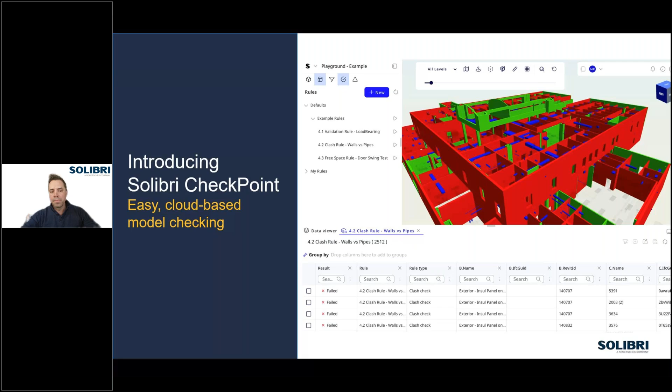Solibri CheckPoint was actually just released to market a few weeks ago. So the purpose of the webinar today is to really provide that first look at what the product does, how it works, show you the look and feel of the product. So we're going to focus on a few things as Ward walks through the demo today. Simplified rule check, so there are just a few rules to consider, which makes it easier and faster to check your model. We support Revit and IFC files, even in the same project.

We bring direct Revit support now. Some key integrations that we're going to highlight are with Autodesk, both Construction Cloud and BIM 360, as well as Procore. So we think it really becomes easier to plug into the majority of workflows here in the US. And also really pay attention to the workflow and the interface. We tried to keep it clean, simple, intuitive, so model checking can really be put into the hands of many rather than just a few power users, to really help drive quality and better project outcomes.

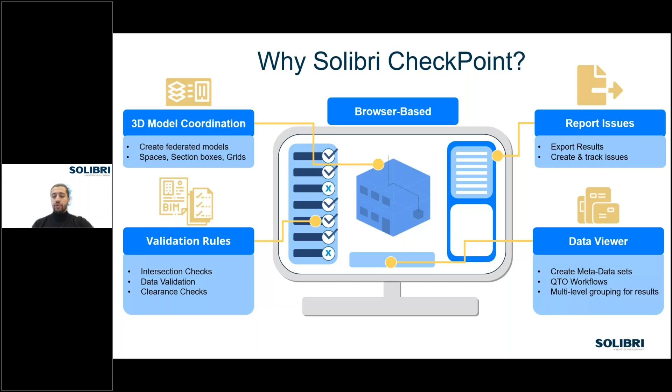Okay, and also about CheckPoint. The instant and generic rule checks make it easier for our users to create hundreds of checks. You'll see the difference, especially for users who have been using Solibri Office. It's important to know that CheckPoint is not a replacement for Solibri Office, it's there to enhance the workflow.

With the generic rule checks we have, you can create hundreds of rule checks to validate your models. You can also create multiple model sets because there's no cloud limitation or cloud space limitation for the number of models or federated models you can have. Also, we're working with both native Revit and IFC, so we're not limited to either one.

Since CheckPoint is fully integrated with other CDEs, just like ACC and Procore, as Jason mentioned earlier, there's live synchronization between these platforms, which enhances overall collaboration. And the most important thing is that there's no plugin or desktop application required to be installed locally or added to CheckPoint in order to check your models.

So that was a quick overview on CheckPoint. If you have any comments or questions, feel free to drop them in the questions section. From now, I'll just stop sharing this screen.

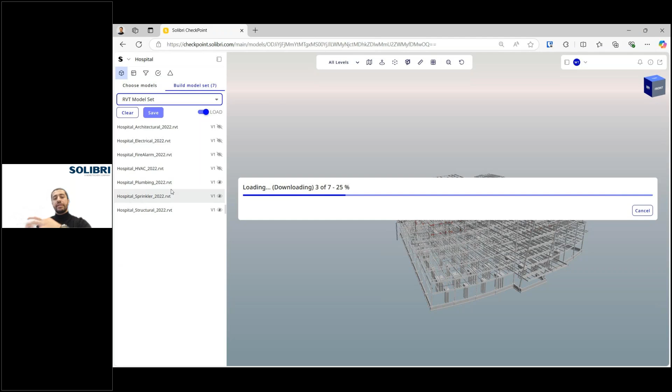Okay, so as soon as it loads, let me give you more insights on the 3D viewer of CheckPoint. Being in the browser allows me to navigate freely through the files without the need to export it into another file format compatible with the browser. What happens in the back end is that CheckPoint gets the original file and converts it through one of our conversion methods into a viewable file in our browser.

This file is compacted, which means it is much smaller than the original file, and this makes it easier to handle in the 3D viewer.

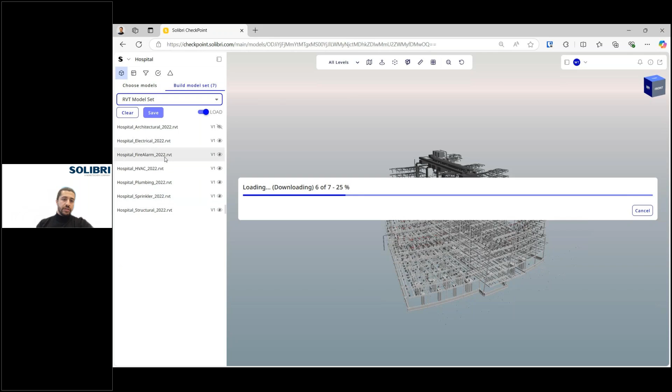Okay, so I see these 6 files. I'm loading 7 different models to create one federated model. As you can see, different disciplines for these.

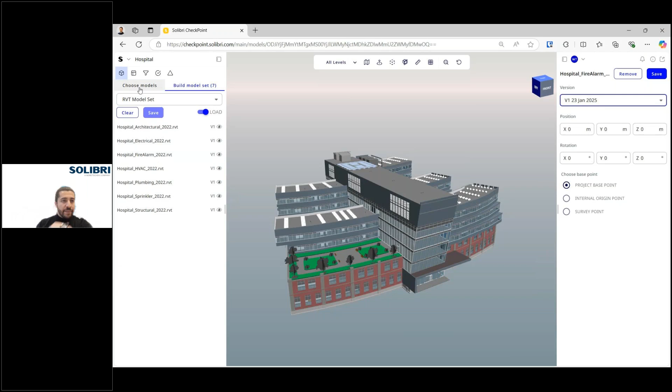Perfect, so it has loaded. I'll just make an update over here. I think this one is outdated, so let me load a different one. I'm going to remove this one, and then we're going to go to the model sets and add the latest over here.

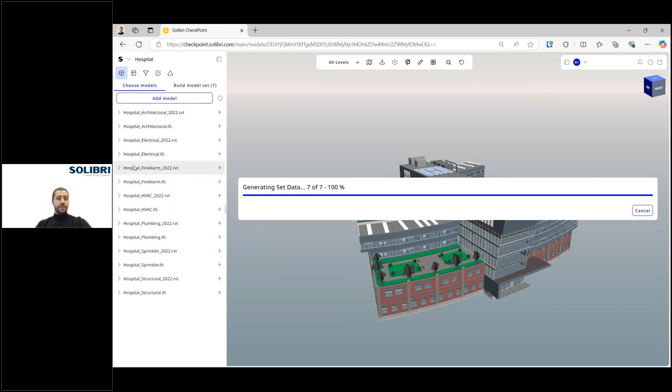Okay, so what I did is add a new version of one of the files, the fire alarm over here. So as soon as we get our files ready in the 3D viewer, let's take a look at the process, the model checking process on CheckPoint.

In the top left corner, you can see the 5 main icons, which represent the 5 main processes of CheckPoint. We thought the model checking process needs to be easier, and that's why any CheckPoint user needs to go through this structured approach.

The first one is models, where, as you've seen, I navigated through the files and added them to the 3D viewer. Then we have the data viewer, which allows me to show the data of my models in a more structured way.

Then we have filters, which allow me to create classifications or filter out elements. You can consider it a gadget to select elements according to specific properties. And then the fourth one, which is rules.

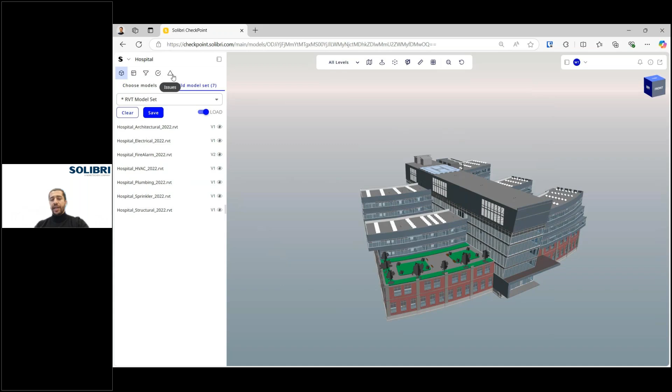And here we have the 3 main validation checks that we have, and the last process, which is issues, where we can create issues, sync them with an issue tracking system we're connected to, or just keep them on CheckPoint.

Okay, so what I'm going to do is go to the elements over here, just to show you some of the elements. I think it's taking some time to load.

There you go, because this is a relatively large model, but you can see we're handling it because it's a native Revit file, and we're handling it in a faster way than other tools, because other tools need this file to be exported into different file formats in order to be faster in the 3D viewer.

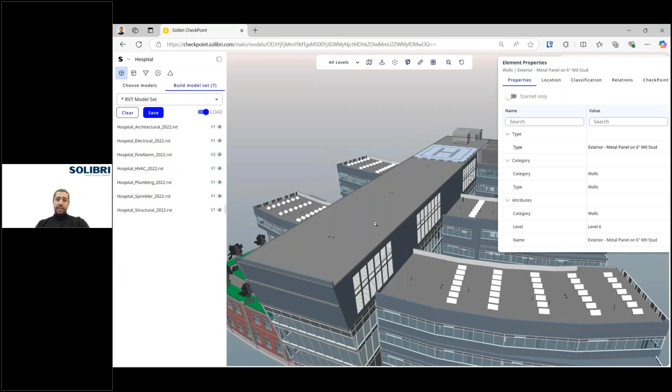Okay, so the element properties over here, we can use them, and then we can go to the second step, which is the data viewer.

And over here, let it load. The data viewer allows me to view all the elements that I have in the 3D viewer, but according to specific attributes, which are being read from the element properties.

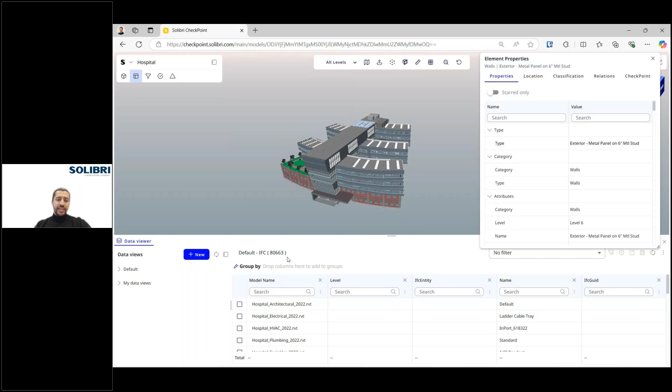So here I have 80,663 elements, and I can view the model name, level, IFC entity. You can see some elements which are empty, and that's because this is an IFC data view, and I have some Revit files.

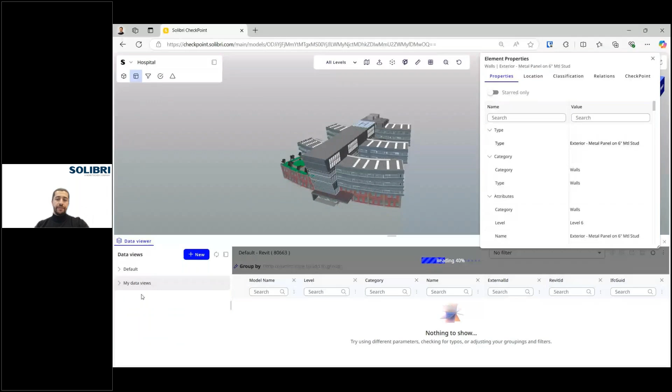So I can go to the default data views. All CheckPoint users will have their own default data views for Revit and also IFC. They can use them, and also create their own data views and save them in this section over here. So I'm loading the Revit default data view, which shows the Revit ID, as you can see, the category and the name.

We have some empty elements, the IFC GUID, and also some discrepancies over here in the level, but that's good, we can keep it. And that's the beauty about CheckPoint, is that we don't scrape out any data. The null values will also be retrieved into CheckPoint.

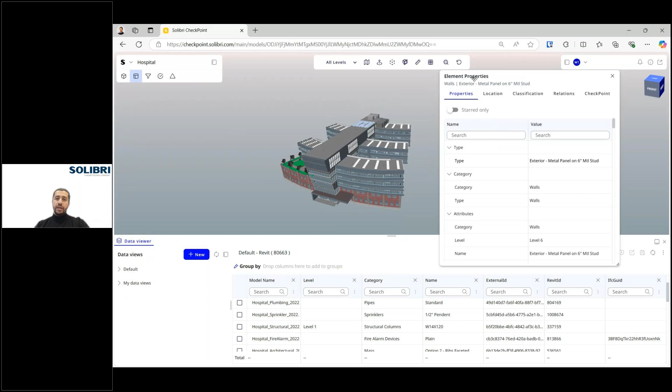And why is that? Because we would like to validate the model. We would like to see these inconsistencies. We want to point them out and show them to our team. Okay, so this is the data viewer.

Next we have filters. So in the filters, you can see I've already created some example ones. If I want to filter out doors, for instance, I can run it.

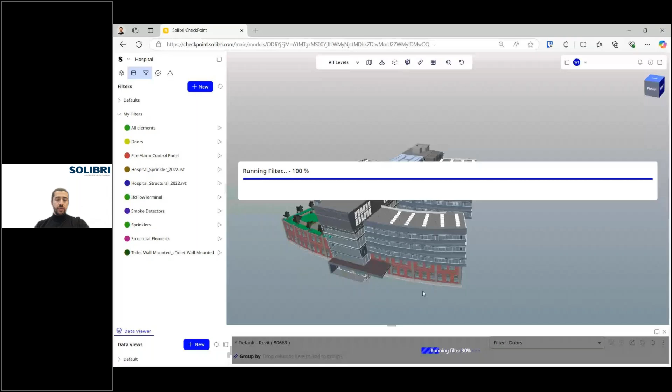And then we will retrieve only the doors. The filters can be basic filters or very detailed filters, it depends on your own requirements. So how do we create them? Let me show you real quick.

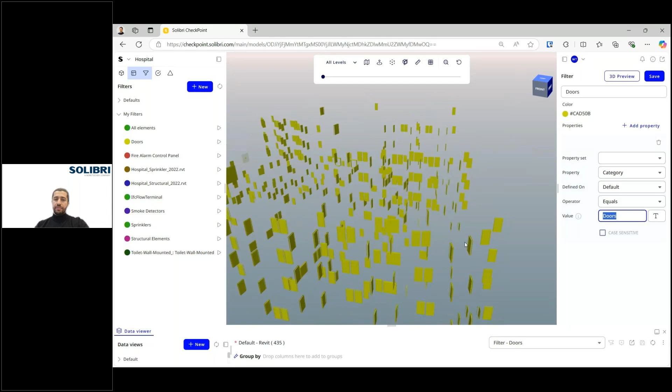So over here, you can see that we're looking through the category property, specifically for doors. That's it. But of course, if you want to make it complex, you can add more attributes and properties to select the elements, and then use different operators for that. Okay, so that's for filters.

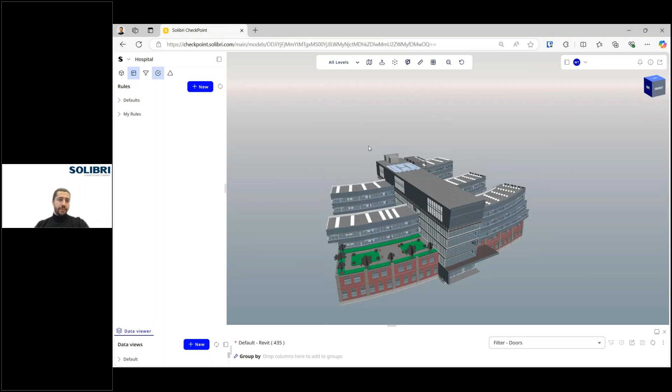The next one would be rules, and this is where the three main generic rules come in. I've already created some, but before that, let me just add a new one from here. This is a new rule, and I'll show you how it looks like.

In the rule type, you can see we have three main checks: clash check, property check, and free space check. You can customize them based on the requirements for every rule and create your own checks accordingly. So if you want to do a clash check between specific disciplines, you need to add a base target and a colliding target.

If you go with a property check, you will have different requirements to add the property and also select the elements that you want to work with. As for the free space check, you will have extra options, like the dimensions for the box we're creating for the elements you want to validate the clearance for.

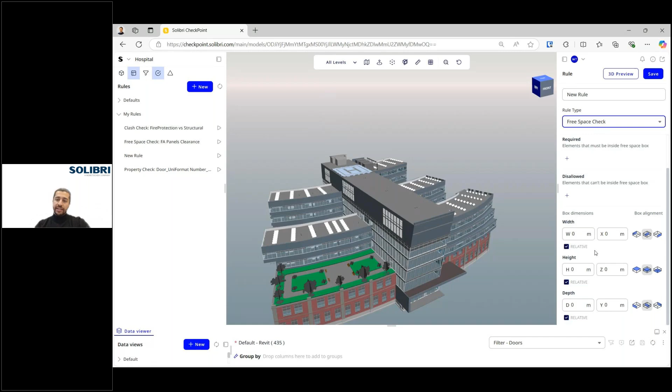Okay, so that was the new one. Let me delete it. And then from here, I've already created some example ones. So the first one is a clash check between fire protection, the firefighting model, and also the structural model. Let me run it.

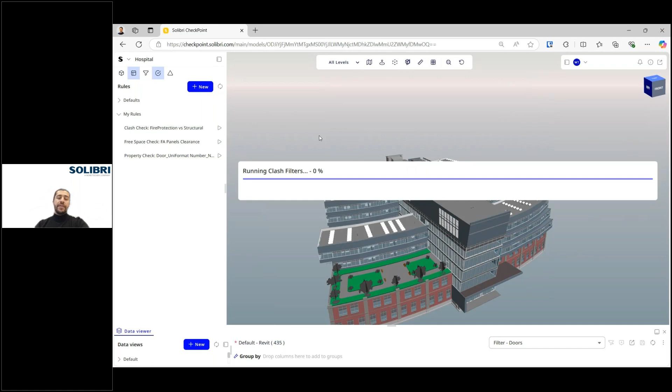You can see it's straightforward and simple. All you have to do is specify your requirements in an easy way. That's why we have filters before rules, as you can see from the workflow at the top. This means you need to first specify your filters, then go to rules and validate your models. There you go, so these are the results.

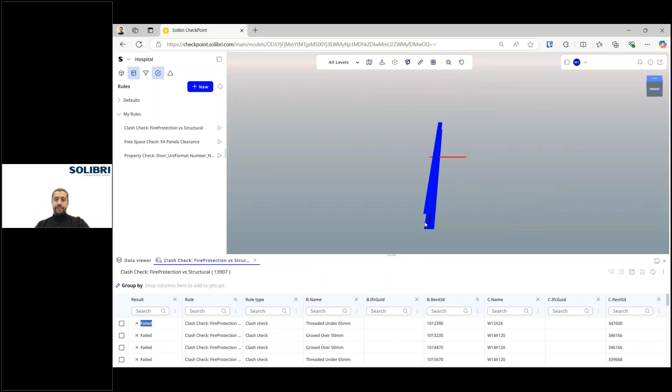We can view them also in the data viewer. I can just double click over here and get them instantly, like this. Let me view the other clashes.

There you go, you can see, for instance, yes, it's the same column over here. So you can see two different clashes in two different locations. Now we can group all these clashes together to make it easier for us to communicate this with our team.

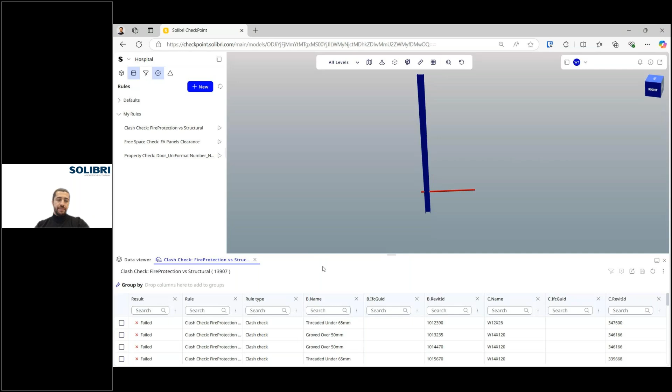So we can create a group for this by the ID of the column, and there you go. I can isolate them all just to see. There you go, I have the two different clashes in one, as you can see from here. This is for the clash check.

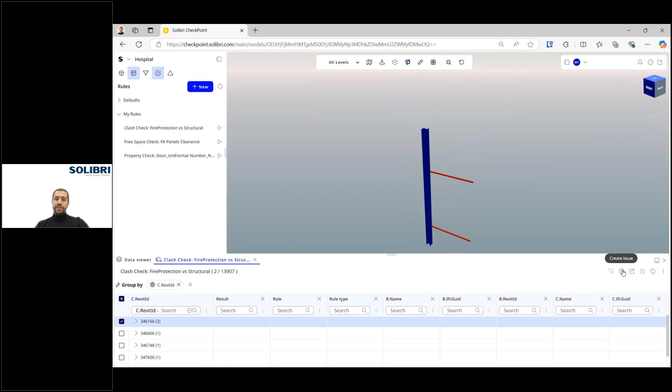And of course, I can report this issue by creating a new issue from the data viewer. Okay, that's for the clash check. The second one would be, let me show you the property check.

So over here, we're going to validate the doors to check if all of them have the uniformat number, meaning it's basically not empty. Let's see how this rule was set up. So you can see that we're looking for doors specifically, and then looking for the uniformat number, and simply checking if it's not empty, that's it.

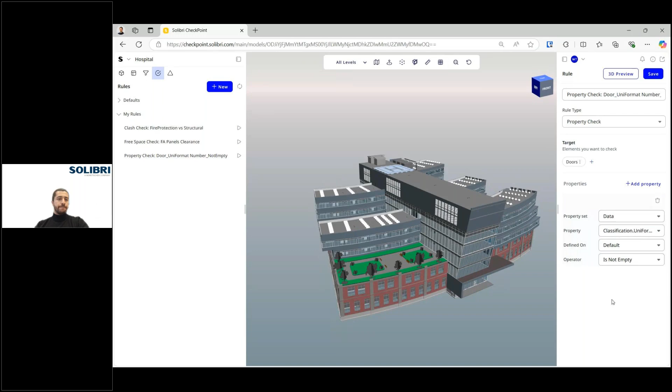So I can save, and then run it from here. Now CheckPoint will go through all the doors and start looking for the properties, the uniformat properties, and check if it's empty or not. If it's empty, it should be retrieved in red. If not, it will be in green.

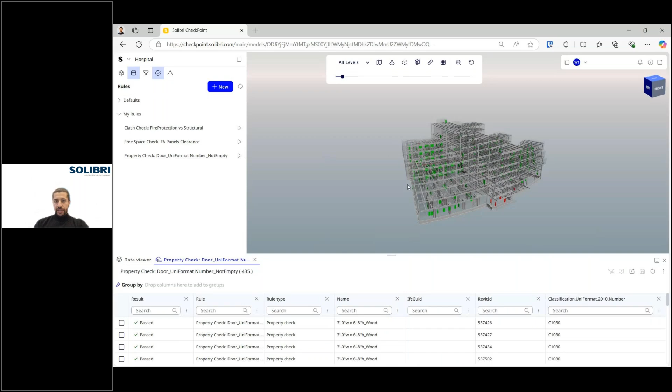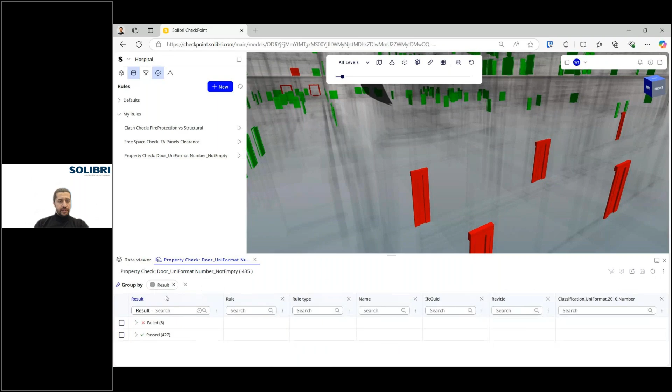There you go, okay, so here you can see these ones are actually empty. And also in the data viewer, you can view that the classification uniformat number has these values for the passed elements. But if I group them real quick to the result, then from the failed elements, you can see it's actually empty. This is how we can validate it.

You can use any operator over there. So if I go again over here, let me show you the list of operators we support: equals, if you have a specific value you'd like to validate, or you can use the any-of operator if you have a list or a long list of values you'd like to comply with, and check if it's added to this property or not.

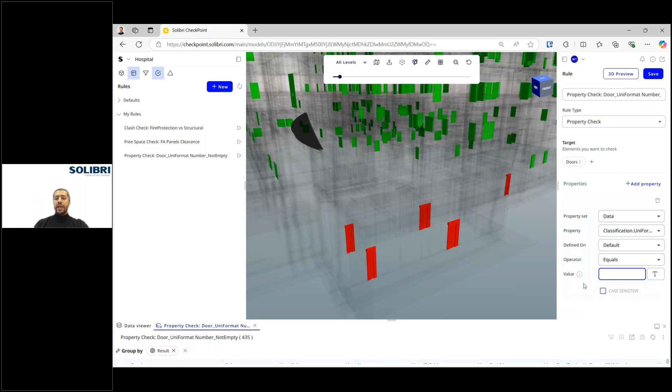And of course, if you type anything, let's say equals, and then you need to add a specific value, here we have some wildcards that you can use to make it easier for you. Okay, so that's for the property check.

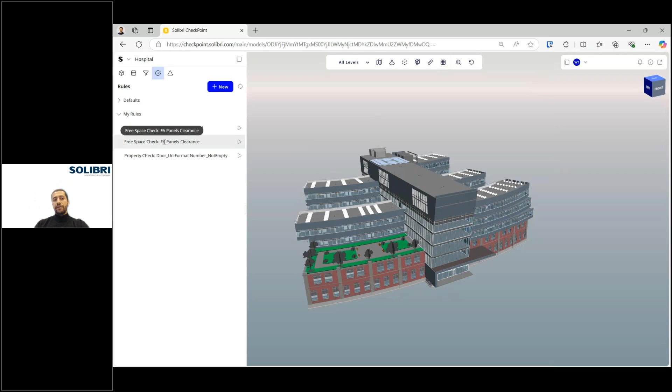And the last check that I want to show you is the free space or the clearance check. Over here, I'm using a very interesting use case, which is whether the fire alarm panels have a space next to them and there are no obstacles for the fire alarm panels. So I'm going to run it. Let's see if there are any obstacles; of course, they should be retrieved in red. If not, they will be retrieved in green.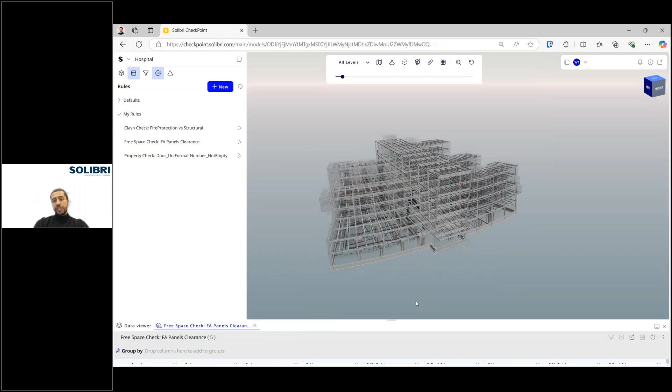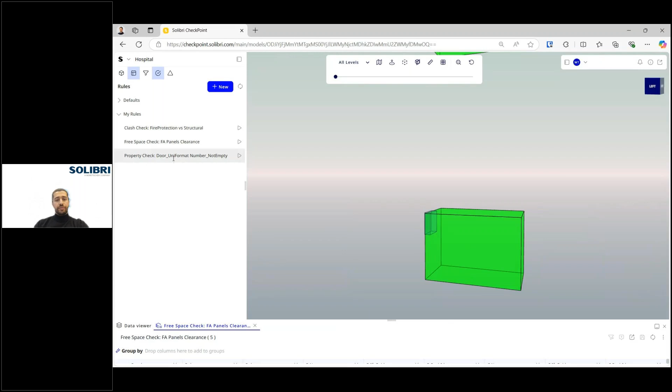Okay, I see everything is in green. So let's remove the context. There you go. So you can see the box that we've created. Now this box was not added in the original files. This is very important. So if I go to the free space check again and see how this rule was set up, you can see that we targeted the fire alarm control panels, and then we disallowed all the other elements. So if there is any element over here, it should be retrieved as a clash. And of course, the dimensions for this box need to be specified along with the alignment.

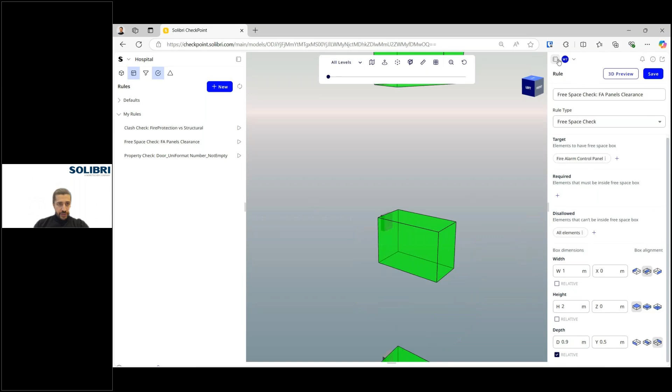Okay, so where did we have the issues before? We had them in the clash check. So I'm going to run it.

I think this is the time for our second poll question. My colleague will drop it over here. So which type of checks do you need the most in your workflow? Which type of checks do you think is valuable for you in your workflow? Is it the clash check, property check, or free space check? Do you do data validation, clearance checks, or intersection checks?

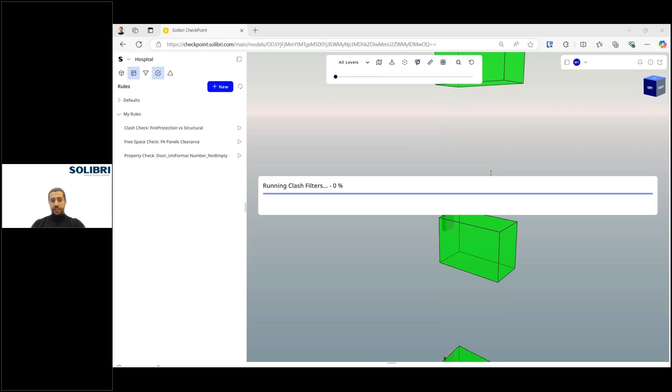Okay, so we've seen that most of the users have requested clash intersection checks. This is quite interesting. I see also there are some people who do data validation checks, which is quite important. Now we see that there's an increase in the demand for data validation checks, but most of you have chosen the clash intersection checks. Okay. So of course, more checks will be added later on, just like duplicate checks.

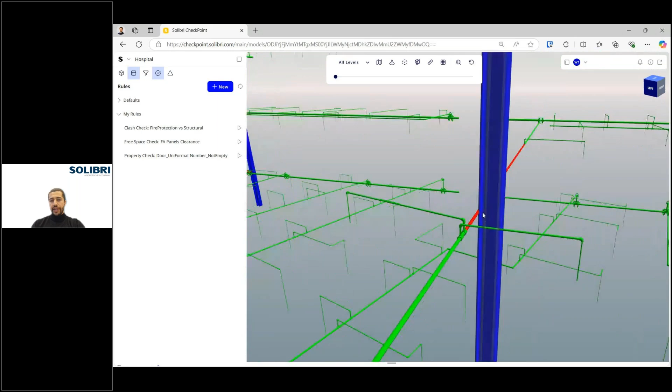Okay, so now we have issues over here. How do we communicate this with our team? How do we create an issue for this? We can simply create it from the data viewer. We can just select the issue and then create an issue from here. Or I can simply go to the last step in the workflow, which you can see on the fifth icon. So I can add a new issue from here.

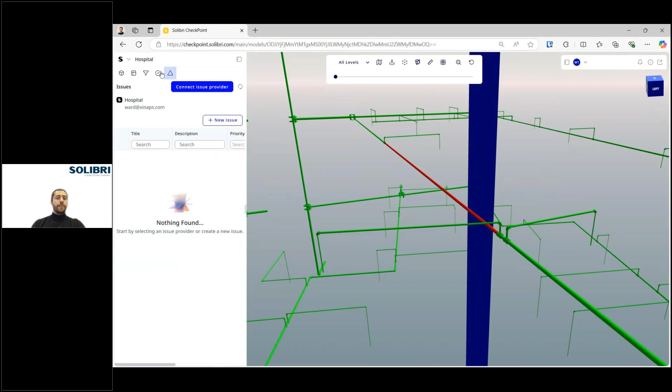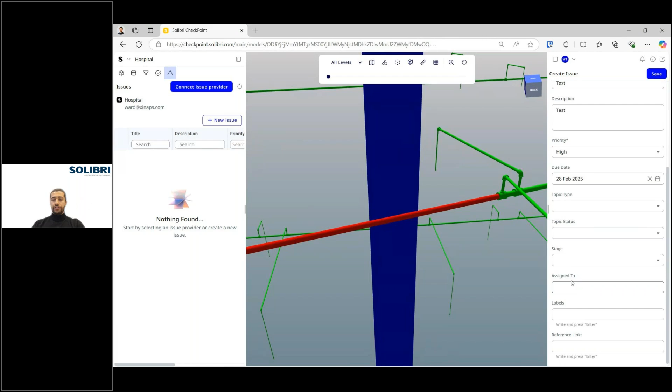I can take a screenshot. If I want to make it more specific, I can select the elements that are required only for this. I can take a couple of screenshots and then I can call it test. You can give it a description and priority. So you can add all the other entries which are required to fix this issue: a due date, topic type, status, stage, and also to whom this issue is assigned. So you can assign it to one of your team members and then simply save it.

Now, if you save it internally on CheckPoint, you'll be able to export it in BCF, the BIM Collaboration Format file. That's one option. Or you can connect to another issue provider. If I go to connect issue provider, you can see the list of integrations that we have at the moment. We're connected to ACC issues, BIM 360 issues, and also coordination issues from Procore. More integrations will be added later this year, and more features as well.

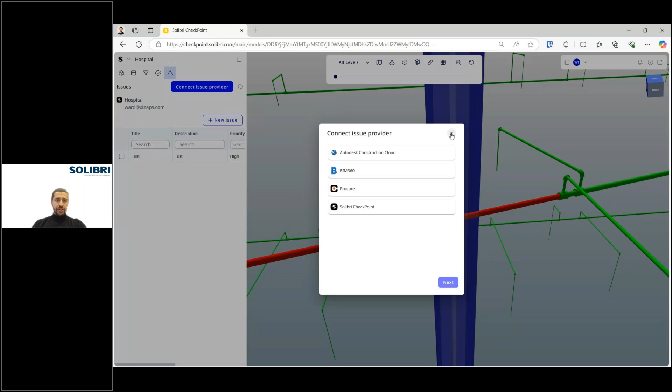Okay, so that was a quick overview of CheckPoint.